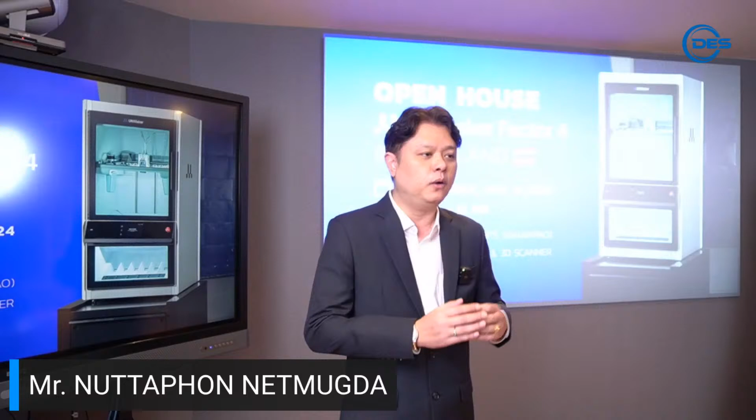สวัสดีครับท่านผู้มีเกียรติทุกท่าน ทั้งที่อยู่ที่นี่และที่รับชมผ่านทางออนไลน์ ก่อนอื่นผมขอแนะนำตัวอีกรอบและแนะนำบริษัทของเราว่าเราเป็นใคร เราทำอะไรบ้าง ผมณัฐพล เนตรมุกดา Assistant Vice President แผนก Design and Engineering Solution ของบริษัทเมโทรซิสเต็ม คอร์ปอเรชั่น จำกัด มหาชน บริษัทเราดูทางด้าน IT Solution Provider ให้บริการทั้งด้านฮาร์ดแวร์ ซอฟต์แวร์ ระบบอินฟราสตรักเจอร์ ออฟฟิศซัพพลาย รวมถึงโซลูชันด้านการออกแบบทางวิศวกรรม และที่สำคัญที่สุดคือเครื่องพิมพ์ 3 มิติ เราเป็นตัวแทนจำหน่ายอย่างเป็นทางการที่ได้รับการแต่งตั้งจาก UltiMaker จากประเทศเนเธอร์แลนด์ ซึ่งวันนี้ทุกท่านจะได้รับชมและสัมผัสกับตัว UltiMaker Factor4 ซึ่งเป็นโมเดลใหม่ล่าสุดจากทาง

UltiMaker แต่ก่อนหน้านั้นผมขอเท้าความนิดนึงว่า เทคโนโลยี additive manufacturing หรือ 3D printing เป็นหนึ่งในโซลูชันสำคัญที่จะนำมาพัฒนายกระดับโรงงานอุตสาหกรรมในบ้านเราให้เป็น smart factory เพราะเทคโนโลยีนี้ช่วยให้การผลิตชิ้นงานง่ายขึ้น ลดต้นทุนการผลิต และสามารถออกแบบหรือพิมพ์ชิ้นงานที่ซับซ้อนได้มากขึ้น จริงๆ แล้วการนำ 3D Printer มาใช้ในอุตสาหกรรมบ้านเรามีมานานแล้ว หลายสิบปีด้วยซ้ำ แต่ยังไม่เป็นที่นิยมแพร่หลายมากนัก สาเหตุหลักคือการรับรู้ของผู้ใช้งานและเจ้าของบริษัทยังไม่เชื่อมั่นและไม่ไว้วางใจในผลิตภัณฑ์ที่ผลิตจาก 3D Printer

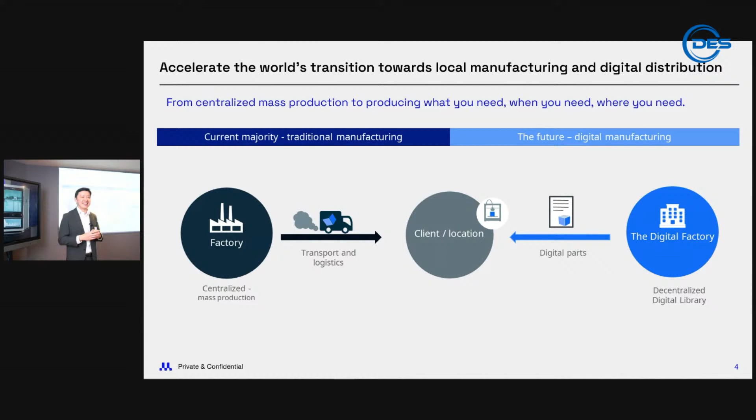But our goal is to achieve what is on the right. That is to have localized 3D printing set up in local factories, and whenever there is a requirement for a part, all that needs to flow are digital files. Digital files will go across the ocean, you print on site, and you get your parts in the shortest possible time. You may think, is this a very far away dream? But it is not, it is already here today. Because what we experienced in the past 3 years with COVID-19 - we have got countries that shut down, you don't have raw material. The Suez Canal, when it was blocked, there was a blockage of raw material as well. And that is where many manufacturers started to think of how can we achieve this dream so that they will continue to maintain the supply chain through different crises like that.

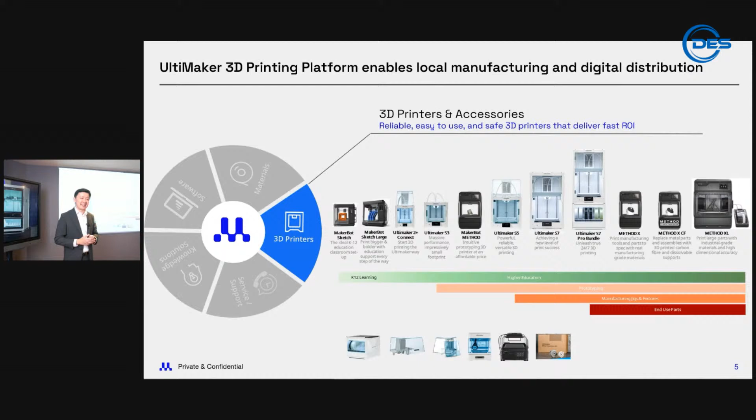Now, so currently customers are already adopting this local manufacturing and digital distribution workflow. So what are they doing right now? It is not only about 3D printers. At UltiMaker, we have a wide portfolio of 3D printers covering K-12 education to higher education, printers for the prototyping market, the manufacturing aids market, and end-use parts. So users can choose from this wide range of products. And on top of that, what is most interesting is the wide material offering that we offer at UltiMaker. Right now we offer more than 26 different types of materials directly from UltiMaker ourselves.

But what if users have requirements beyond what we can offer? That's where we have the Material Alliance program at UltiMaker, where our users can tap on more than 300 different materials from more than 65 manufacturers to achieve their requirements with 3D printing. This is something very unique, and I would dare say this is the largest portfolio of materials for FDM or FFF printing in the market today.

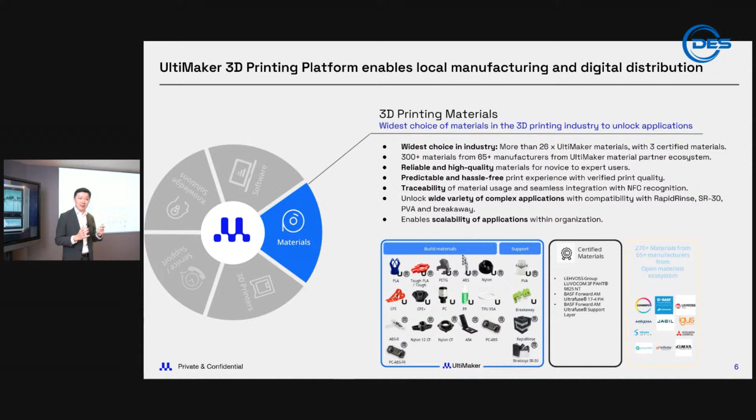Now, not only that, we talked about printer, we talked about materials, but the thing that connects everything together is software. At UltiMaker, we have UltiMaker Cura, the best-in-class print preparation software. I'm sure most 3D printing users, if you get started with 3D printing, you probably use Cura, right? UltiMaker Cura currently has more than 1 million users, and we are processing more than 2 million print jobs on a weekly basis. If a user is just getting started, they can use the basic settings where we make preparing a print job very easy. Or if the user is quite advanced, they can deep dive into more than 400 settings to customize the print job based on what they require.

So first is about print preparation. Now secondly, let me talk a little bit about the UltiMaker Digital Factory. The UltiMaker Digital Factory allows print administrators to manage their various print fleets. I talked about this vision that we need each plant to have a set of printers across multiple locations. When it is spread across so many locations, how do you manage the print fleet? That's where we have the Digital Factory, where all the printers can be connected together. You can manage print queues, manage the priority for print jobs, and even assign groups and different teams to access the various printers.

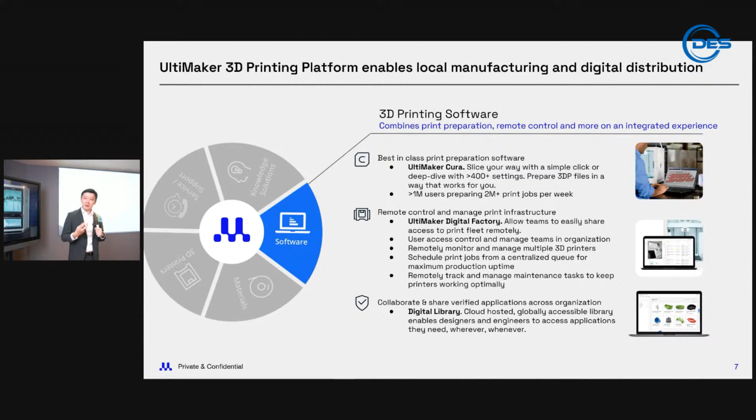And lastly, I want to talk about the Digital Library. When we talk about scaling 3D printing, many times we need to be able to share verified print parts with different locations. So this is where we have a library, which is a central repository. If you think about it, what we are doing is creating a vending machine. That means on location, if a user needs a spare part, they will browse through the library, click print, and the print job will start on their local printer. A couple of companies are already doing this right now. When the machine breaks down, they're able to very quickly print a spare part and get the line running again in the production environment.

So that is what users are using this for so far. But right now I want to give you a quick update on where we are in 3D printing in the professional and industrial segment. There was a report done by Jabil: from 2019 to 2023, the adoption of 3D printing in manufacturing aids has grown 21%, while those using 3D printing for bridge production has gone up by 20%, and those using it for production parts have gone up by 15%. This tells me that 3D printing has already matured and is getting a lot of traction in the industrial and manufacturing space.

Right below, I have plotted a chart that highlights, in a product life cycle, where are the possible opportunities for 3D printing. You can see on the left, 3D printing is heavily used in prototyping, whether it's creating visual models, visual prototypes, or functional prototypes. We also see a growing trend of more customers using 3D printing to produce production tools, manufacturing aids, or even low volume production. And of course, we have also gone into spare parts replacement as well for 3D printing.

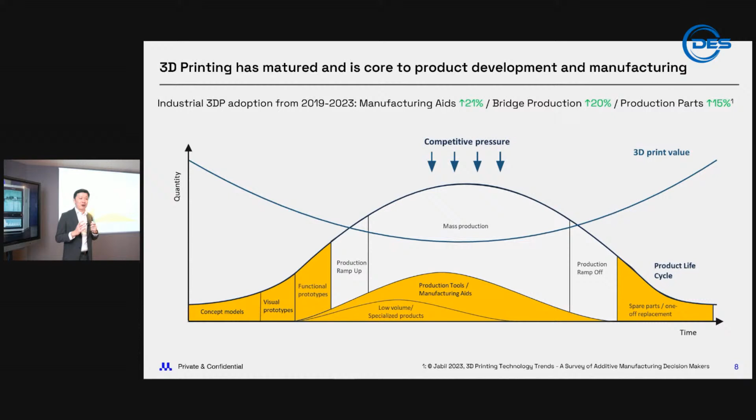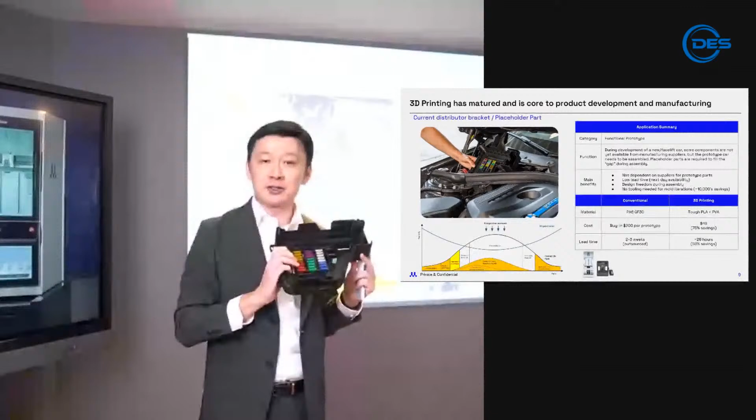At this juncture, what I will do is share with you some interesting applications. I want to show you some examples of what users are using in these different segments. First up, I want to talk about functional prototypes. This is an example of a fuse box used in the automotive sector. If you think about it, when a car company decides to develop a new car or a new facelift, there are many components that are not available yet.

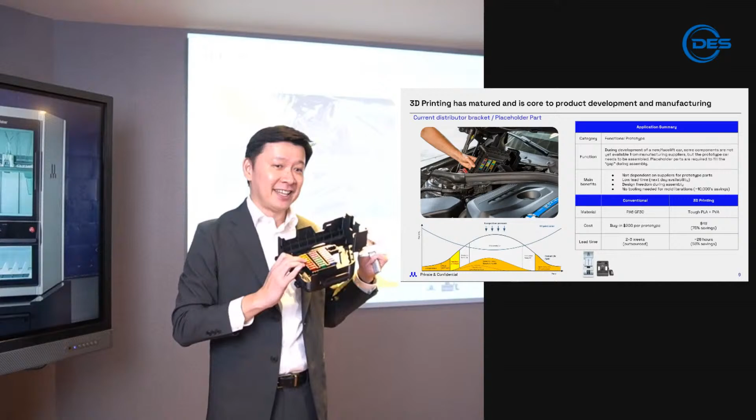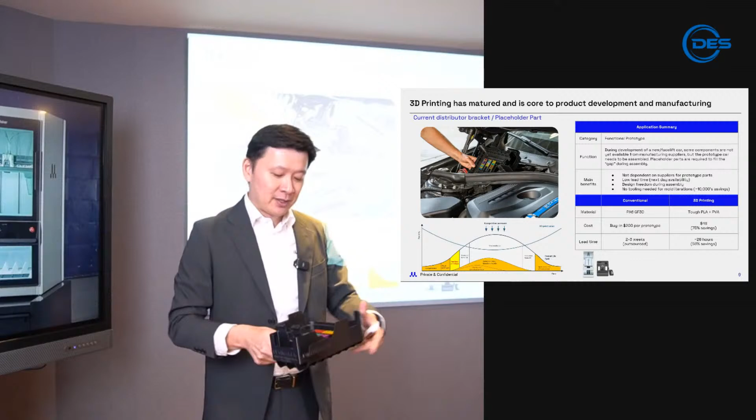Designers, while waiting for the components to come, can easily design a fuse box like this and use it as a placeholder part. That means during the R&D phase, they can put this as one of the components and build the other parts around it.

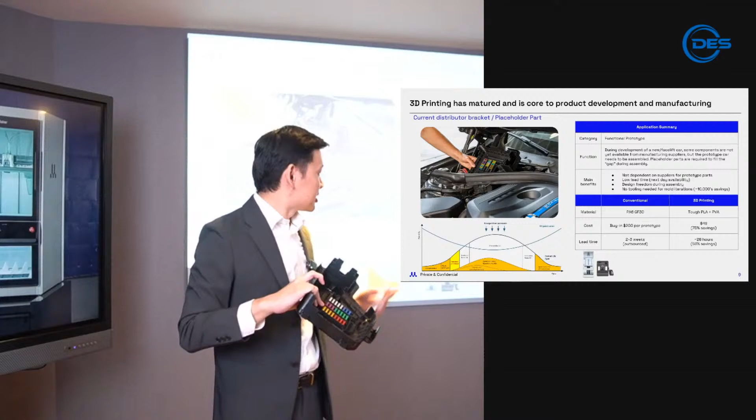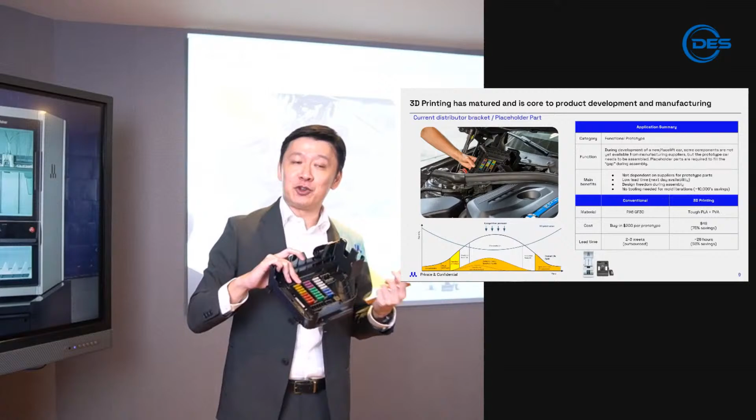What are the benefits of something like that? Definitely there is a cost saving, about 75% we estimate. But what is more important is lead time, because many times these prototypes have been outsourced and the lead time is about 2 to 3 weeks. But with 3D printing, this can be done the next day. So imagine the designer does the design, prints overnight, and the next day they collect the part and continue the prototype.

So the main benefit of using 3D printing for prototyping is innovation. A lot of people ask what is the benefit of 3D printing for innovation. It's because 3D printing allows very quick product iterations. If this doesn't work, I make a design change and the next day I have a new part, compared to waiting 3 weeks for a new version. This allows much more innovative products to be produced by the company.

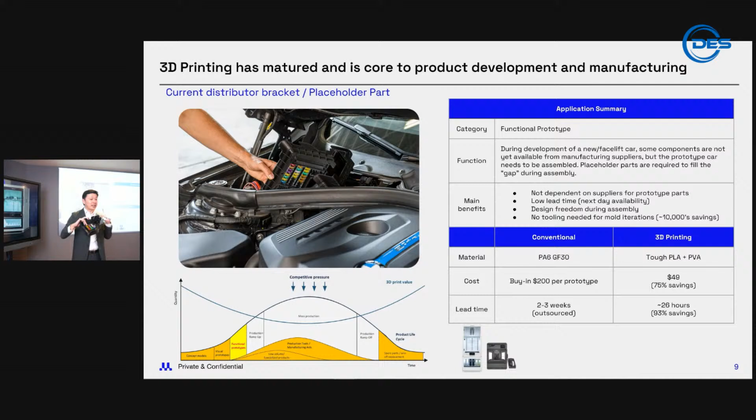So up next, let us move into the production tools and manufacturing aid segment. I want to show you another example from the automotive segment.

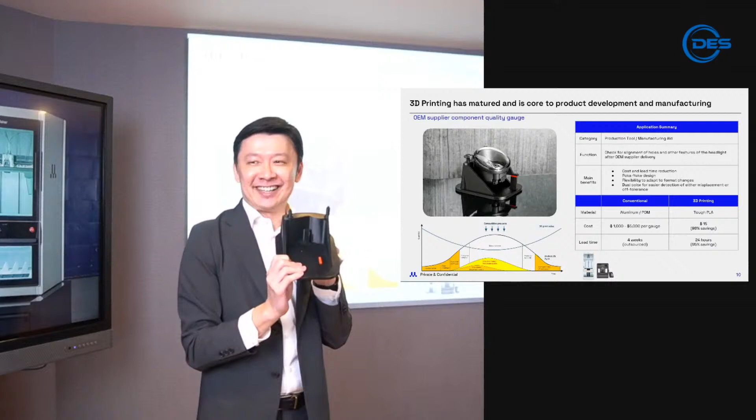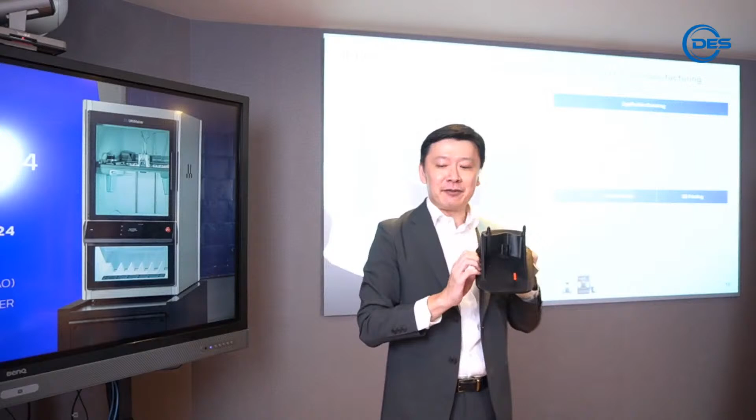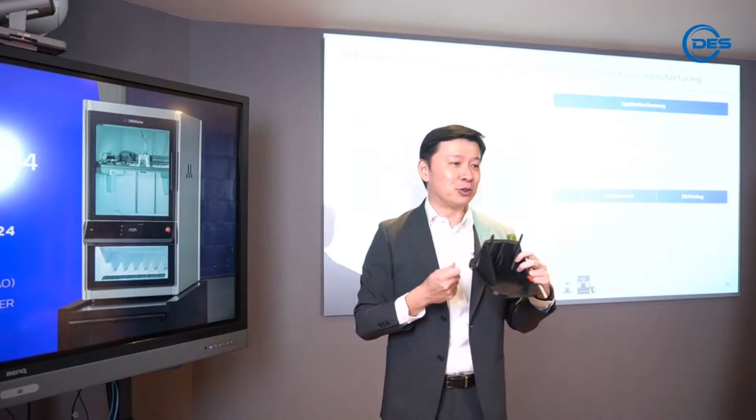This is used in quality control. This part looks very simple, a simple geometry, built with tough PLA, but the value behind it is tremendous. In a manufacturing environment, many components are purchased from external suppliers. When the parts are received, the quality department needs to do a quality check before accepting the parts. This is a lengthy process - they need to come up with the inspection document, do the CMM, take the different measurements. It's a very long process.

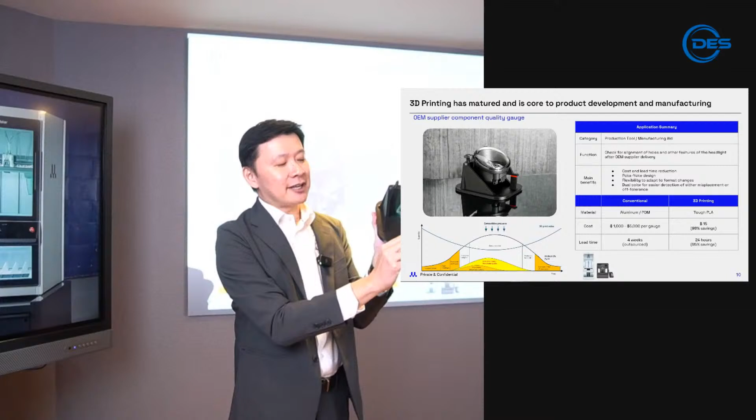But innovative companies have been creating something like this - this is what we call a go, no-go gauge for quality control. You can see the end product on screen here, this is a headlamp of a motorcycle. So now the QC person takes the product and mounts it on here - does it fit the little pins here? If it does, this passes. You also notice there is a red color portion here in this application, which gives a visual gauge to the QC inspector. If they can see the red, that means it is out of spec, and they will reject the part.

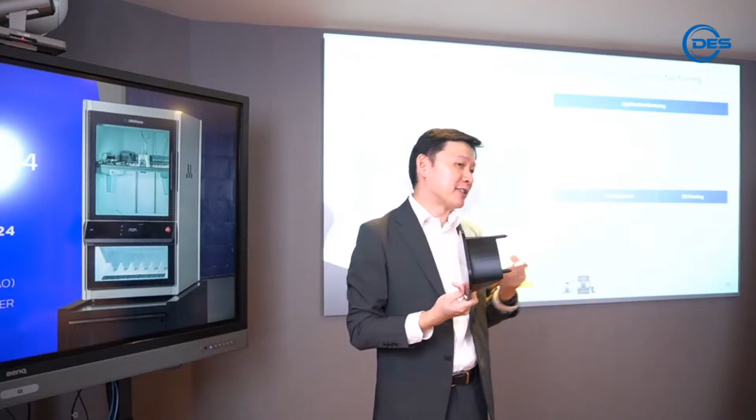A tool like that, if you customize it, usually costs about $1,000 to $5,000. 3D printing is about $15, very huge savings. But I think what is more important is you save a lot of time in the QC process. So it's an operational efficiency tool.

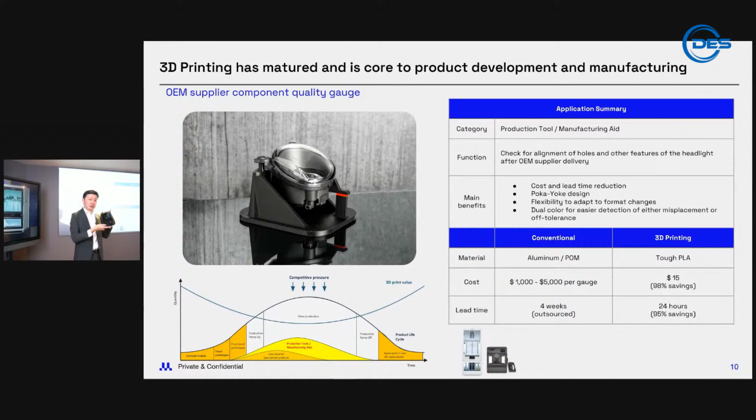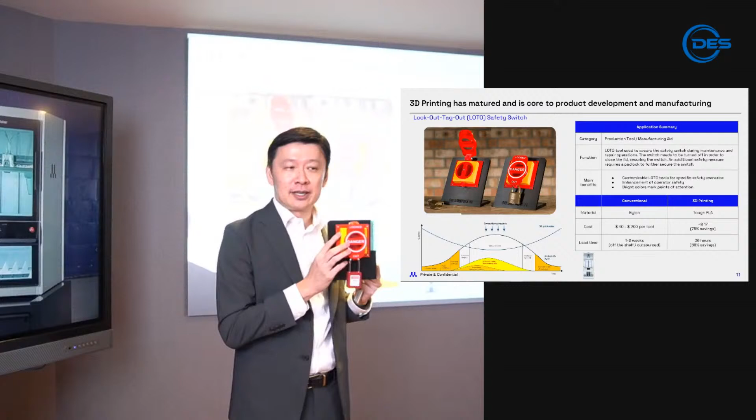Moving up next, let's talk about another important thing in production, and that is safety. We have observed a lot of users, especially those in automated packaging lines, developing a lot of LOTO tools. LOTO tools are the lockout tagout device. During the maintenance cycle, you need to lock down the machine so that the operator will not get injured if this machine is accidentally turned on.

This lockout tagout device is done in the UltiMaker S7 Pro bundle - the whole thing is printed, all the colors, all the words and everything. We are allowing customers to customize the LOTO tools to fit their safety process, because there is no price tag to safety. Safety is very important, especially in manufacturing.

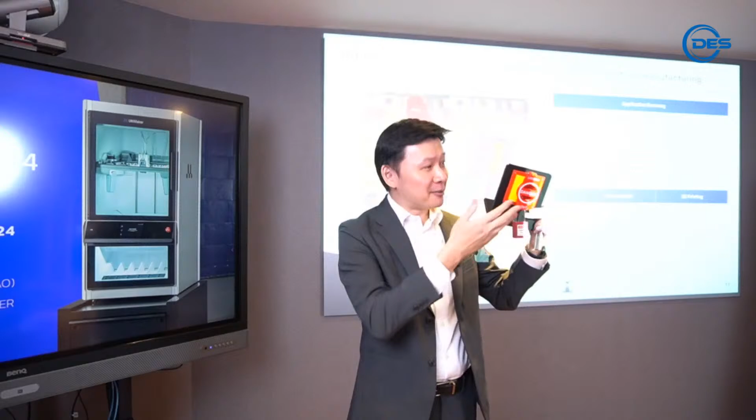So what this does is you are able to ensure it is turned to the off position, close the cover, and put a padlock onto here. After the maintenance is done, the operator will come in and unlock this. Let me try it out to show you how this works.

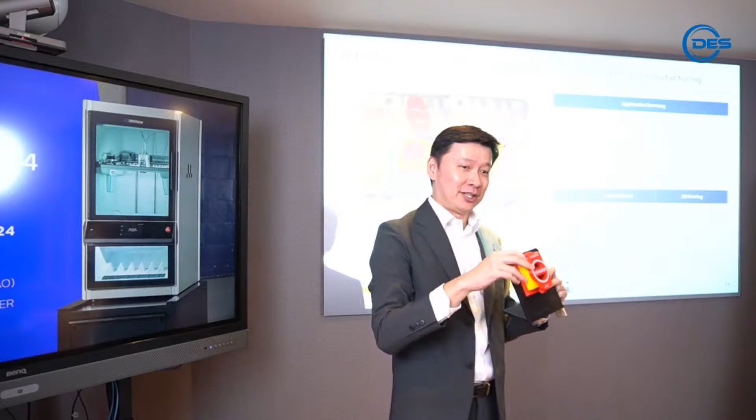When it is locked out, you take out the padlock, flip this on, and you can turn the switch to the on position. This is a very innovative tool for 3D printing. A tool like that, savings wise, is about 70+%, and usually it's purchased off the shelf, so there is a lead time saving as well.

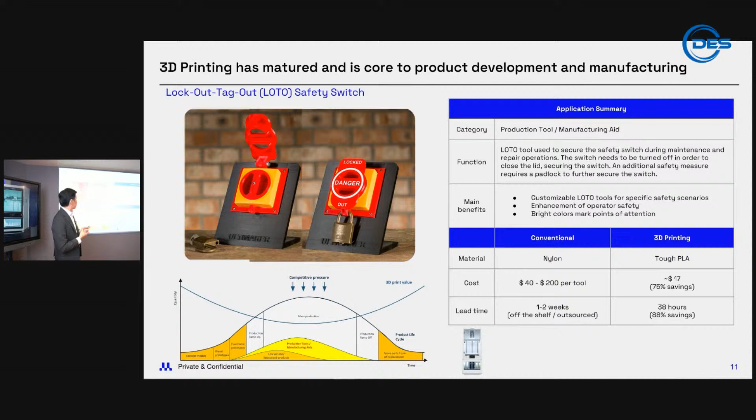Okay, the last example I want to talk to you about is more about the spare parts and also the small volume auxiliary parts market. Now 3D printing has matured to a point where you can print with a lot of high-end materials, whether composite materials, glass fiber, carbon fiber, or even metal filaments.

Good news is on the UltiMaker we have the metal expansion kit. They can print with a 17-4 PH filament, send it off to a debinding and sintering center, and get the part within 1 to 2 weeks. There are savings here definitely, but the benefit behind this is they are able to further optimize the design. They use topology optimization and generative design to fine-tune the design before coming up with the final part.

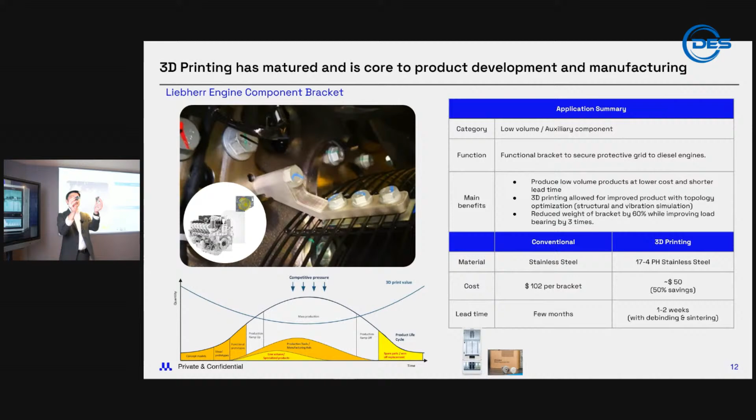So for metal parts, I do have some samples here, feel free to look at that. These are the green parts, not debound and sintered yet. And it's also very unique - our metal expansion kit has support layers. You see these white color bits? These are ceramic supports. So you can print very complex geometry metal parts as well, using the support material.

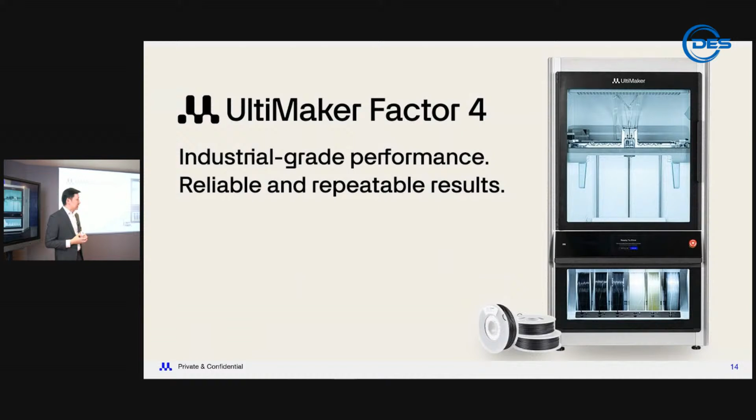So it is against this backdrop I think I've sort of convinced you that 3D printing has matured. More and more users in the professional industrial segment are using 3D printing. So it is at this juncture we thought that at UltiMaker it is the right time for us to industrialize our platform further, because we need to meet the needs of manufacturers with 3D printing. So with that, I would like to formally announce, in Thailand we are launching the UltiMaker Factor4, industrial grade performance, reliable and repeatable results. I will play a short video for you.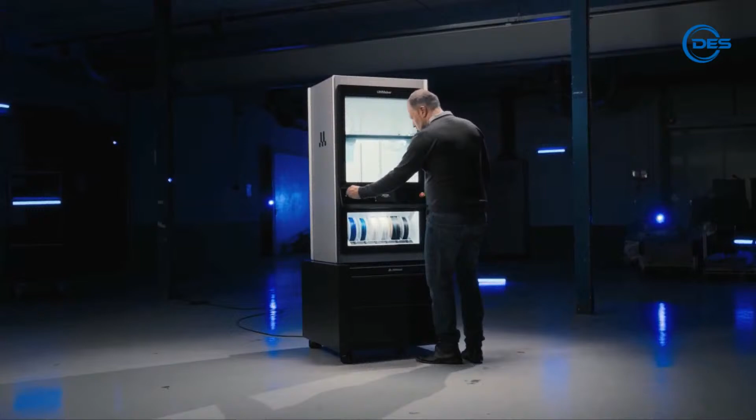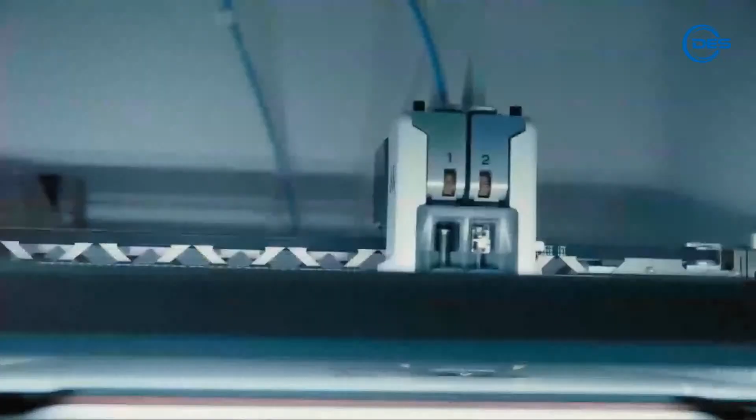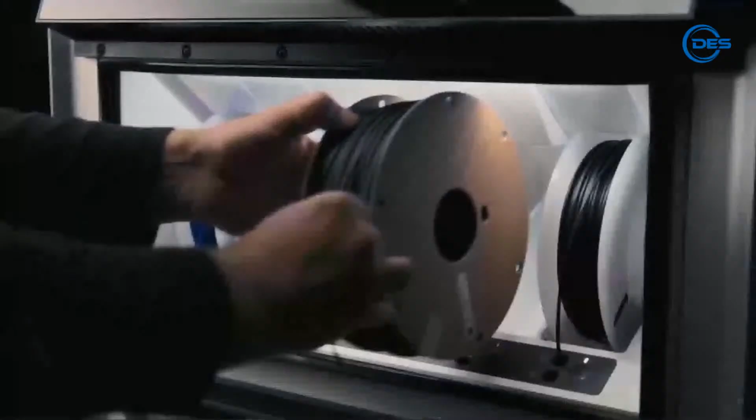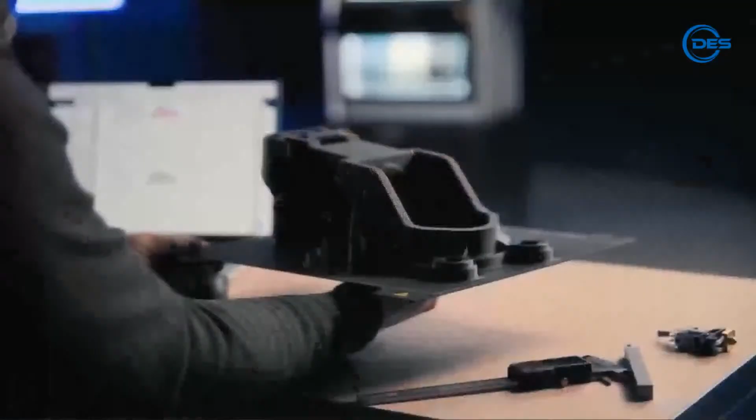Introducing the UltiMaker Factor4, industrial grade performance with reliable and repeatable results. Streamline production, simplify processes, and keep your operations running. Featuring onboard print process reporting, direct dual extrusion, and engineering-grade materials, Factor4 achieves unrivaled predictability and minimal variance. Precise temperature control across the build envelope, a triple insulated build chamber, and built-in HEPA filter ensure consistent production output on complex and challenging designs. Its H-bridge gantry and direct drive head enable rapid dual material printing. Factor4 is capable of reaching up to 340 degrees Celsius on its print cores, 70 degrees Celsius on the print chamber, and 120 degrees Celsius on its heated bed. Factor4 redefines the standards of 3D printing in manufacturing environments. Its conspicuous red stop button ensures easy and safe operation should there be a need to immediately halt printing. An integrated material handling system allows engineers to print consistently and confidently with a variety of durable and high-performance materials, ranging from the new PPS CF to fully flexible low-Shore A polymers, all while integrating seamlessly with Cura and major AM software platforms. Tested to achieve over 95% print success rate, Factor4 delivers consistent results across multiple machines. After each print, it provides an in-depth report, offering comprehensive insights into each print job. UltiMaker Factor4. Industrial-grade performance, reliable and repeatable results.

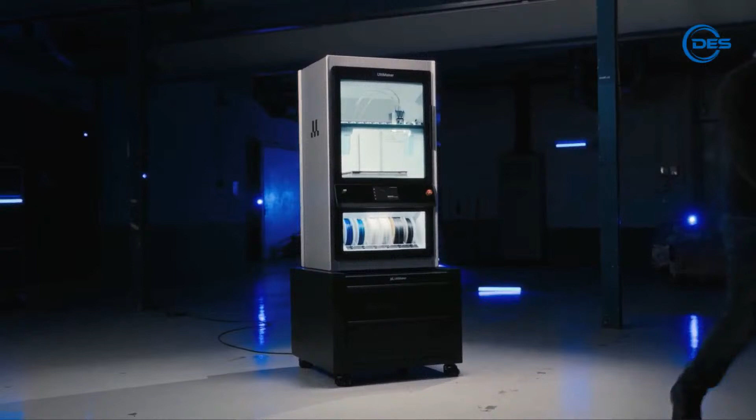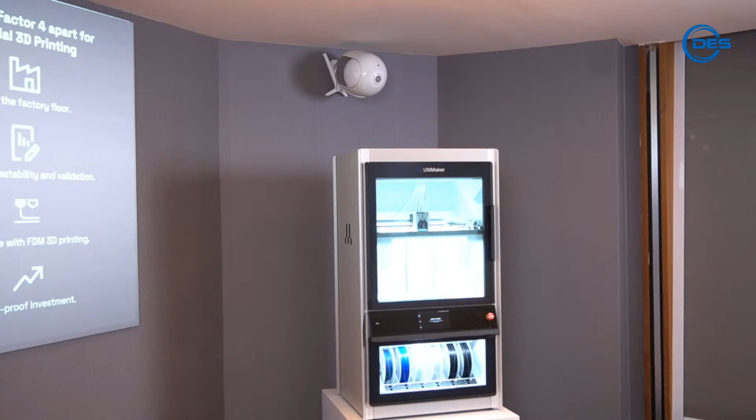Okay, that is the UltiMaker Factor4 - industrial grade performance, reliable and repeatable results. So what sets it apart from the other printers that we have launched previously? First up, it is built for the factory floor - I will go into detail on what it means. There is also a high focus on accuracy, reliability and repeatability, because these are the things that manufacturers require from UltiMaker. We will be talking about what more you can do for FDM 3D printing with the Factor4, as well as share insights on how this technology is a future-proof investment.

Okay, so first up, let us talk about the UltiMaker Factor 4 being built for the factory floor.

First look, if you take a look at the printer, it looks very different from the UltiMaker S series. For those of you familiar with the S series, you'll notice the color, the form, it looks very industrial, and the materials used are different as well. There's structural steel, more sheet metal parts used to build this printer for more stability and robustness for the production environment.

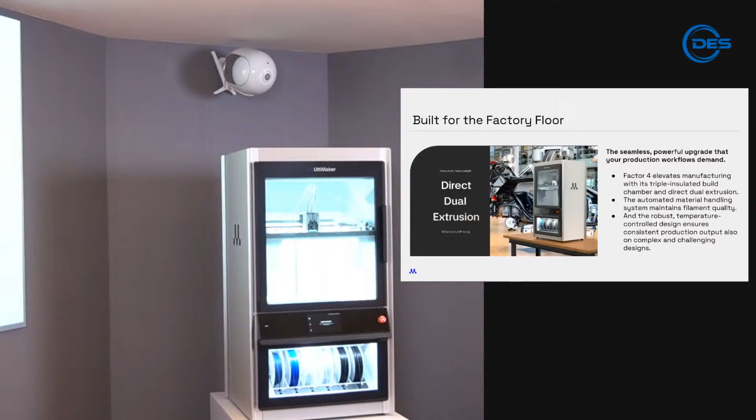And on top of that, the UltiMaker Factor 4 is triple insulated. On the sides and the back, there are 3 layers of insulation - sheet metal steel, TPU foam, etc., to maintain the temperature in the build volume. And in front, the door is double glazed, to keep the heat in the build chamber and ensure consistent quality.

And on top of that, if you look right below, there is a material handling station. This allows users to print non-stop for hours, up to 6 times 1 kg spools of filament. This material handling system also ensures that the filaments are the highest quality so that you get the best possible print results.

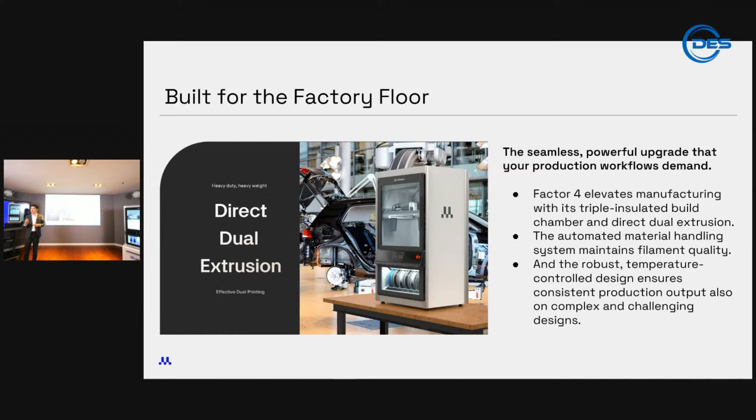So to dive deeper into the additional features for the UltiMaker Factor 4 that make it suitable for the factory floor - first up, let us talk about accuracy, reliability, and repeatability.

For the very first time, we are going to launch software in the printer itself that will generate a report after every print. That means after every print, you can download a report from the printer that will highlight possible points of weakness and possible points of failure. This is the first time ever we are taking an R&D feature and releasing it to the market because we think this is high value for the industrial segment.

And of course, in the middle, we are talking about the material handling station. It is fully integrated into one unit and keeps the relative humidity below 15%. This ensures that filaments put into the material handling system are kept dry, especially in a climate like Thailand. In Thailand, it's very humid, it rains all the time - you need to keep the filament dry to get the best possible quality.

And of course, we are also introducing a red stop button. On the right hand side of the printer, there is a button, which is a requirement for the factory floor. For the longest time, industrial customers have been asking for that, and we have made it available for the Factor 4.

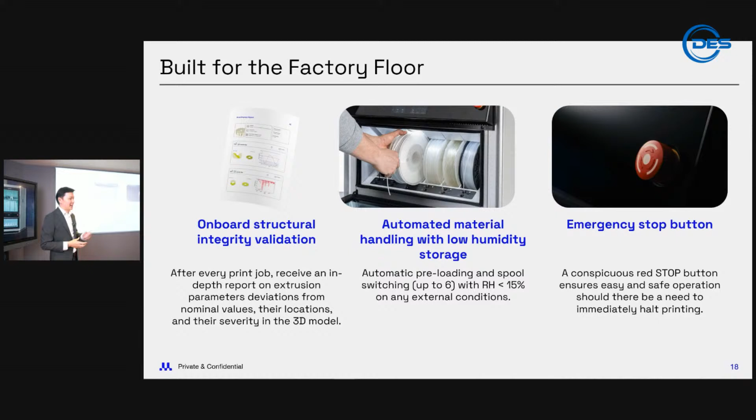Okay, so let us now talk about reliability, repeatability, and validation. For the UltiMaker Factor 4, we are promising a 95% success rate with this FFF technology. We have never done this before - we have tested it with our base materials and we can assure 95% print success rate.

But on top of that, we are also promising print accuracy. For the UltiMaker Factor 4, we are promising dimensional accuracy of up to 0.2 mm, plus or minus 0.2% of the feature nominal length, and this is across the entire build volume of the printer. If you take a look at the build volume, it's pretty huge - 330 by 240 by 300 mm. Imagine something this size with high accuracy, high dimensional tolerance - that is unheard of in the FFF segment, in this professional FFF segment.

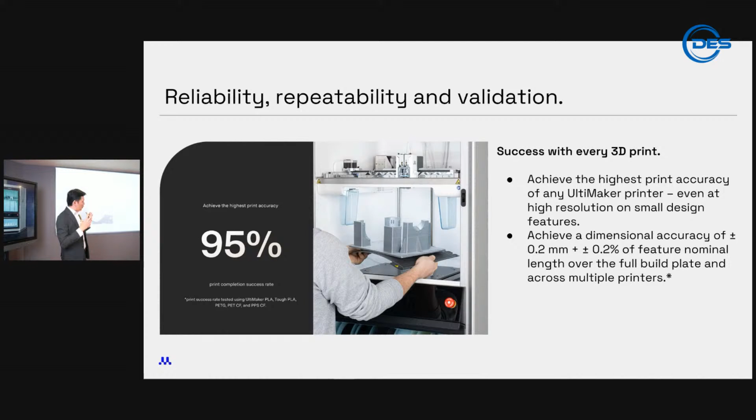So what are we doing in the technology to achieve this kind of accuracy? Let me now talk to you briefly about how we actively control the temperature in the UltiMaker Factor 4. It is actively temperature controlled up to 70 degrees Celsius in the build chamber, while the build plate is maintained at up to 120 degrees Celsius.

How we achieve this is there are multiple sensors within the printer itself. To the left and right of the print bed, there are sensors to detect the temperature of the build plate, and there's also a temperature sensor right on top as well. It will exhaust upwards.

They will detect, based on the filament that we are printing, what temperature is required. If the machine needs to increase the temperature, it will suck up the heated air from the material handling station to maintain a consistent temperature.

This way of maintaining consistent temperature, together with an H-bridge gantry made of steel that's very robust and stable, along with the brand new print head we've developed, all contributes to very high quality prints, very repeatable results, and also very reliable prints.

Even when we talk about temperature variation, the maximum we detected was about 2 degrees Celsius, which is pretty impressive for this category of printers.

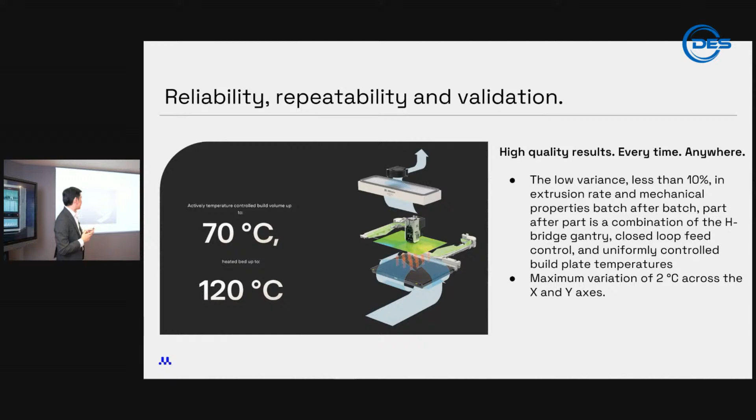With this technology, you can achieve a lot more with FDM 3D printing. Right now, for the UltiMaker Factor4, we allow for dual direct drive extrusion. This means we can now more accurately control the flow rate and retraction rate of 3D printing.

With this, we can start to print more flexible materials, examples like this. Because now with direct drive, you've got more friction, you're able to print very flexible materials. Like this is a 70 Shore A material - you can crush it up and it returns back to its form. Oops, I dropped it. So you're able to do this.

On top of that, we are also launching a brand new print core called the UltiMaker HT print core. This is a 0.6 mm print core that can print up to 340 degrees Celsius.

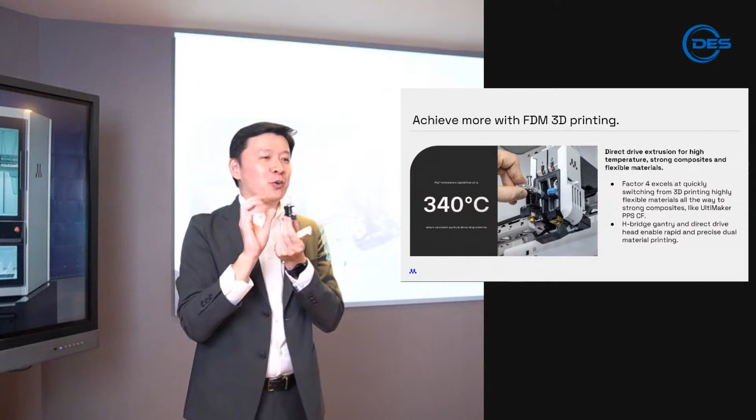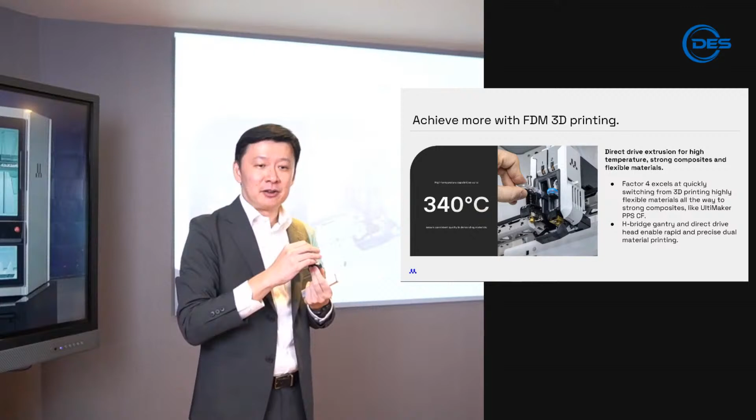What does this mean for our customers? This means right now we are allowing customers to print mid-to-high temperature, so you're able to print higher temperature resistant material to fulfill more requirements in the industrial sector.

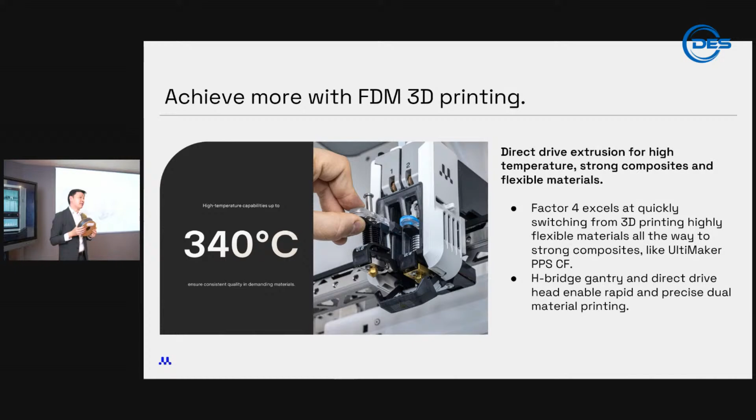And of course, together with that print core, we are launching a brand new material called PPS Carbon Fiber. I will talk more about this later on.

It's pretty interesting because this material is now very temperature resistant - it can operate up to 240 degrees Celsius. It is flame retardant, UL94 V0 certified, and it's also resistant to chemicals up to 200 degrees Celsius. So if you think about it, this is a very fit-for-purpose material for industrial applications.

And of course, the UltiMaker Factor4 is future proof. Together with all the nice things I talked about, we have also upgraded a lot of hardware. There's an HD camera on board, and there's a new H-bridge gantry.

Currently the Factor4 already prints 1.5 to 2.5 times faster than the UltiMaker S series. But with this upgrade, we are staging it for future continuous improvement as well, so in the future you can expect even much higher print speeds with this technology.

Together with that, we have also updated all the processors in the printer itself - there's stronger computing power. You can expect that with more computing power, we can introduce more technology to this printer. And I talked about the print process report - this is also one of the reasons why we needed stronger computing power to do that.

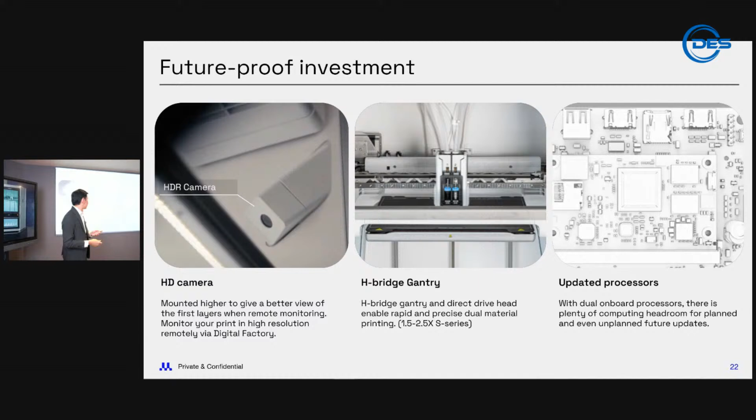Talking about print process reporting, let us spend some time on this very unique feature we are launching. Print process reporting, in essence, is a report that tells users what are the various measurements that are out of range from UltiMaker specified measurements.

So what usage is there for industrial customers? Industrial customers developing end-use parts can actually attach this report as a compliance certification to assure the end user that it has gone through this print process, and these are the findings from this report. So there's always peace of mind when delivering the end part to a customer.

And for customers that are doing batch production, doing small volume batch production of end-use parts.

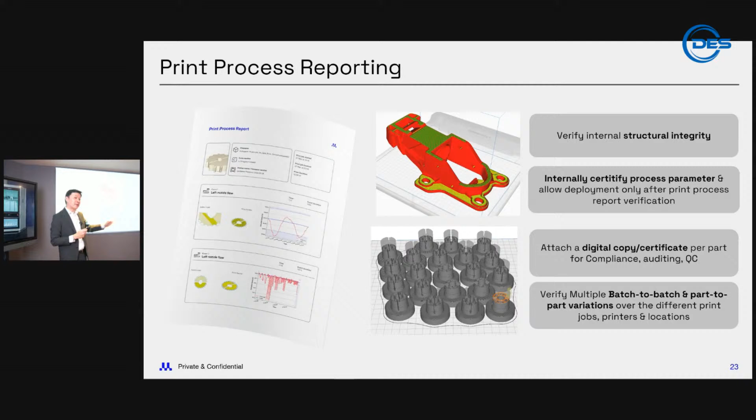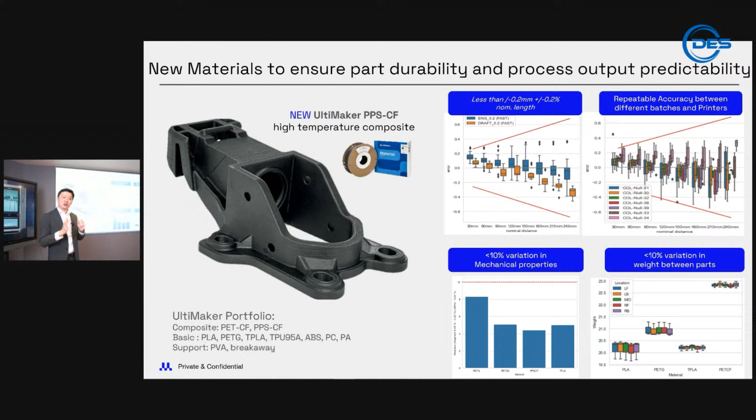Now let us talk more about this brand new material we are launching called UltiMaker PPS carbon fiber. It's temperature resistant, it's a strong material, it's chemically resistant as well. We have fine-tuned this material to ensure it fits those things I talked about earlier - dimensional accuracy of plus minus 0.2 mm, as well as a very small variance between parts, whether it's a part in a batch or a part across multiple printers. We have tested it - there is less than 10% variance for batch production. That is what we are promising to market.

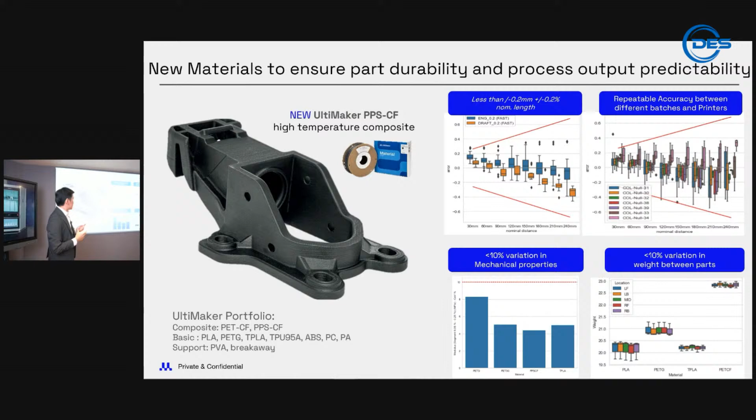So let's talk more about PPS carbon fiber. It's a very durable material for extreme conditions. The operating temperature can go up to 230 degrees Celsius, and it is chemically resistant in solvents up to 200 degrees Celsius, and it is flame retardant - it meets the UL94 V0 standard.

This application you see on the left is used in a military aircraft. In an aircraft, when transporting cargo, you need to strap the cargo down to the base of the aircraft - this is actually bolted to the ground. There is a belt that goes around the cargo and you tighten it on this application. Think about it in an aircraft environment - when the plane takes off in the sky it's very cold, when it lands in Thailand it's 35, maybe 38 degrees, very hot. Think about the temperature difference - the material is able to withstand this kind of temperature difference.

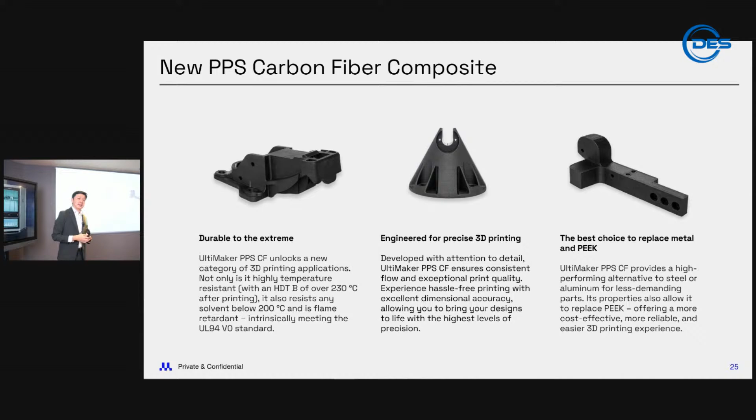Number two, being on the aircraft, it needs to be flame retardant, and it is also chemical resistant, because they could be washing it, exposing it to grease, exposed to different chemicals. So this is the right material for this kind of application. Together with that, we have developed the profile with the accuracy I talked about, so it is really for very precise 3D printing. We are expecting that PPS carbon fiber will also be a good choice to replace metal and even PEEK components. Just to give you an idea, these are the parts - this is how it sounds, sounds like a metal part. Drop it around, it is perfectly okay. This is the kind of material that is very suitable for the manufacturing environment.

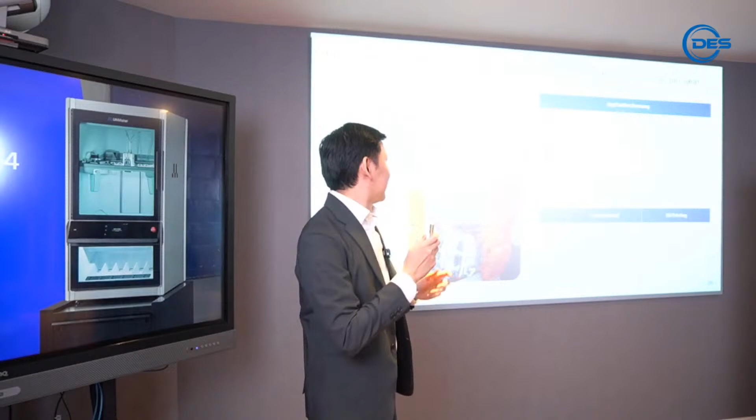Let us now talk about some of the validated cases we have already done with the UltiMaker Factor4. The first application here is from an automotive company that builds brake calipers. They have this application you see on screen - this is a holder that holds a very hot product and puts it through a robot for machining purposes. This product, when it takes a cast part out of a foundry, is at a temperature of about 140 degrees Celsius, and it is always subjected to a 12 kg compression load.

So what the engineers in this company did was develop a holder like that - this is the part that is highlighted here. They developed this to grip onto the caliper, and the robotic arm carries the caliper to a circular saw to cut away the runners and other things. They told us that they were able to achieve a lot of savings from this one application alone - they can save 65,000 euros per year.

Imagine how much savings the UltiMaker Factor4 can bring when they have developed 20, 30 or 40 applications. This is a real benefit, and currently they have told us that it's been more than 5 months now ever since they started testing, and it is still in operation.

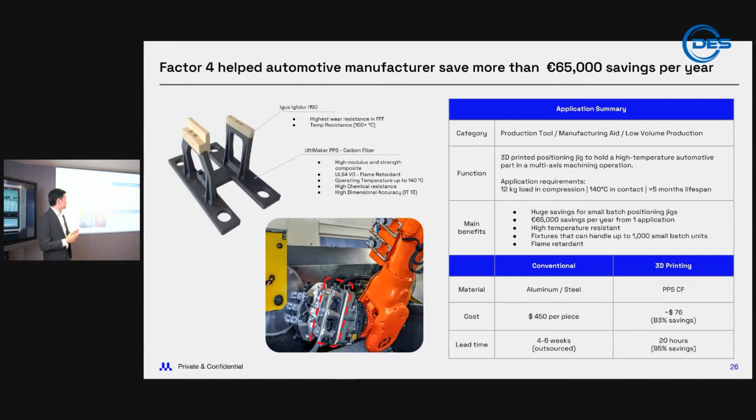Another useful application is in automated packaging lines, because increasingly we are seeing a lot of robotic arms and cobots in the production environment. A lot of manufacturers are always looking at how to make the production line more flexible. But how flexible a production line is depends on what products it can pick up, and many times it's the end of arm tooling that controls how flexible that line is.

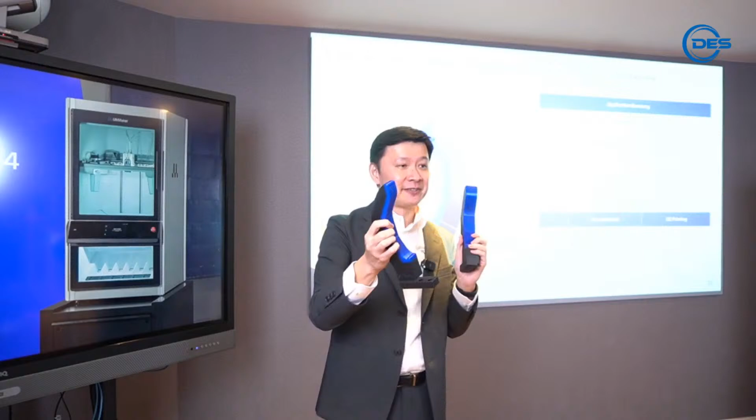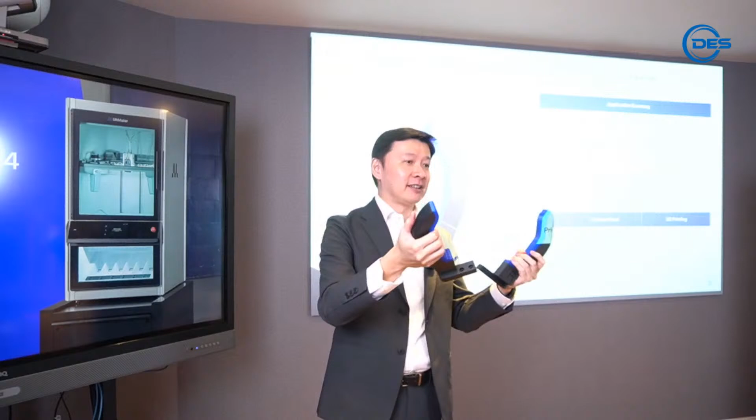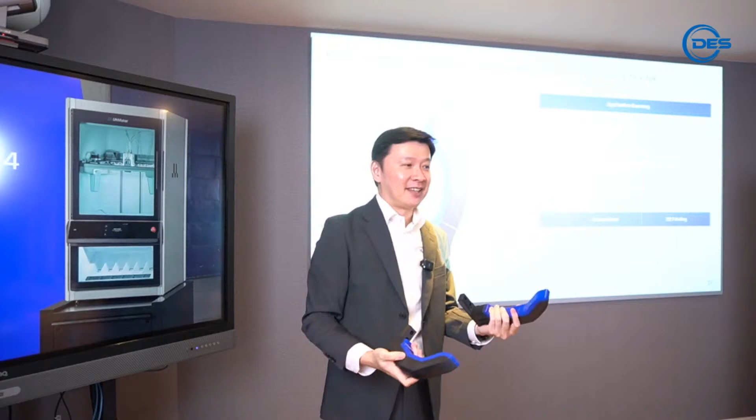Here's an example of a robotic gripper. This is built with PET carbon fiber, and on the interface, it's built with a softer TPU material. What we are offering right now is the possibility to get the best of both worlds: a very strong material with a very soft interface to protect the products it's picking. Just to show you, it's a very strong material, it doesn't just break like that. But yet it is soft enough to protect the goods that it is picking up. So customers in automated packaging lines, if you use a lot of cobots, think about how this is possible on the UltiMaker Factor4.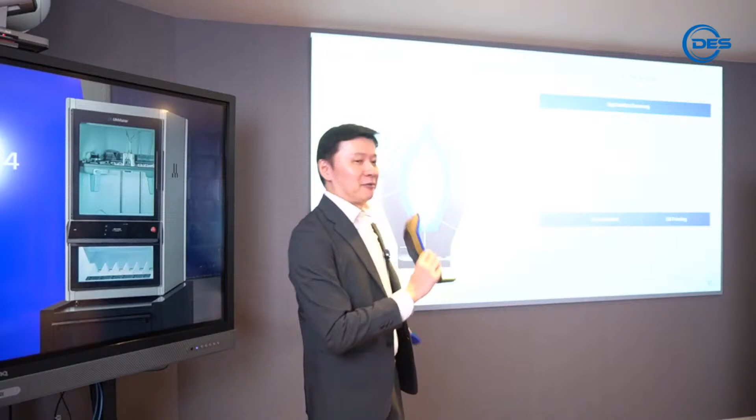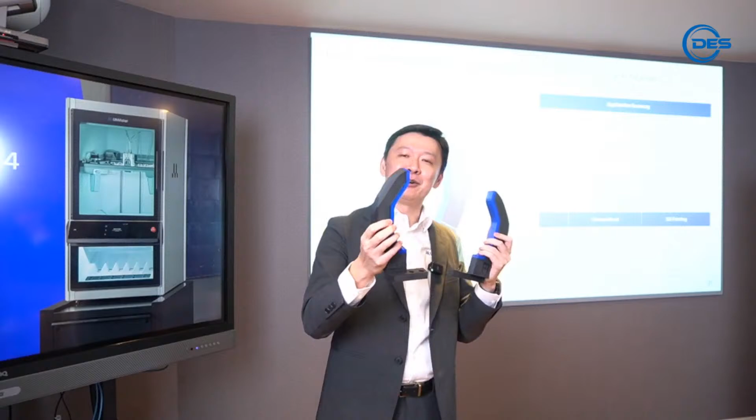One thing I need to mention, this is also made possible with UltiMaker Cura, because these materials have got very different temperatures. But somehow we have a feature that is able to merge both materials together in a single print.

On top of that, the UltiMaker Factor4, the way it is designed and developed, is highly modular in nature. The Factor4 has 35 different modules that can be easily swapped out. The reason we designed it this way is to make it easy to service, because we know for manufacturing environments, high uptime is a high requirement.

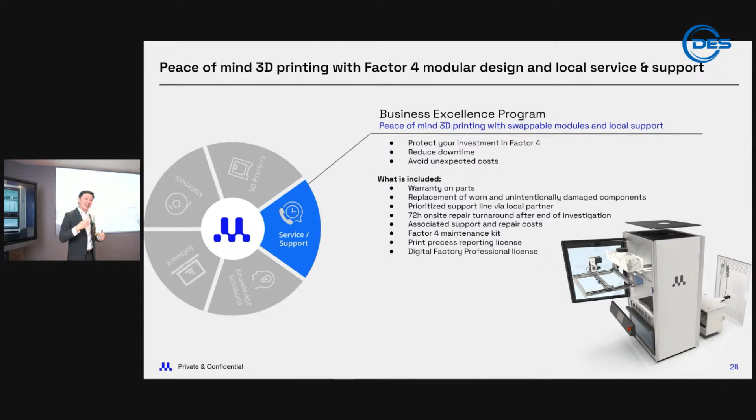So if a printer breaks down, the team, your local partner, in this case Metro Systems, will be able to do the troubleshooting with you. If we have identified that a certain module needs replacement, an engineer will go on site, replace the module with a few screws, and put on a new module, and you can start printing again. It is because of this modular nature that we are able to do a quick hot swap kind of service, so that if you are in a production environment, you have peace of mind. You don't need to think about why the printer is down. We want to get you up and running as quickly as possible.

The last thing I want to talk about is knowledge solutions. As we were talking to many manufacturers in the market, they are telling us that FDM is good, there are a lot of interesting case studies, but I do not know what materials I can print with, I do not know what applications I can develop, and I do not know how to build a business case so that I can prove to my boss to continue to invest in 3D printing.

We have things like materials. What are the materials in FFF? Which material is suitable for what application? We'll be talking about how do I identify the right parts and focus on these parts to develop for FFF.

All the way to designing. When I'm designing, what is the thought process in ensuring a successful print in FFF? All the way to Cura and print operation.

Once a user completes this, they can take an exam and receive a certificate. This is first being launched in the Asia Pacific region, and I'm happy to announce that Metro Systems is our very first UltiMaker certified training provider, launching this service to the Thai market.

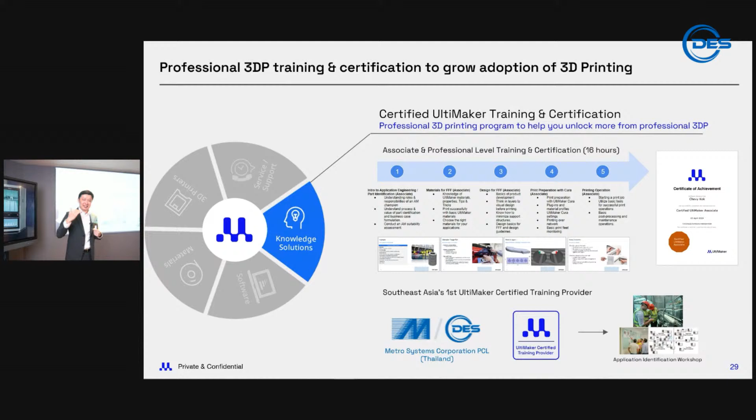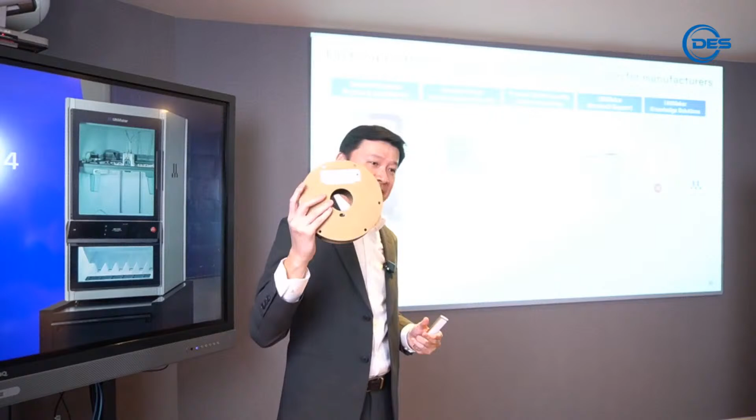We have a maintenance kit, a high-temperature print core like the one you see on camera, and in terms of materials, we are launching PPS carbon fiber, a very interesting material for 3D printing.

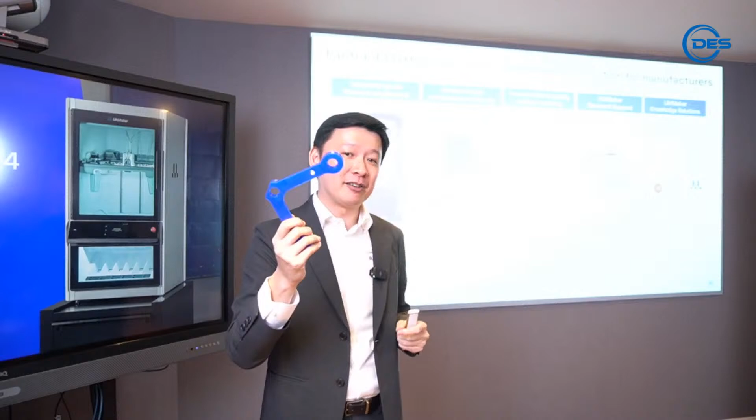We have a very robust and big third-party material alliance program, and we have a couple of material partners that have already tuned their specialty materials for the UltiMaker Factor4, including one provider that tuned a very soft and flexible material for it.

Together with that, we are launching print process reporting for generating a validation report after every print.

We have also talked about a service offering. Each UltiMaker Factor4 will come together with a service and support package so that any broken modules can be quickly swapped out and you can continue printing.

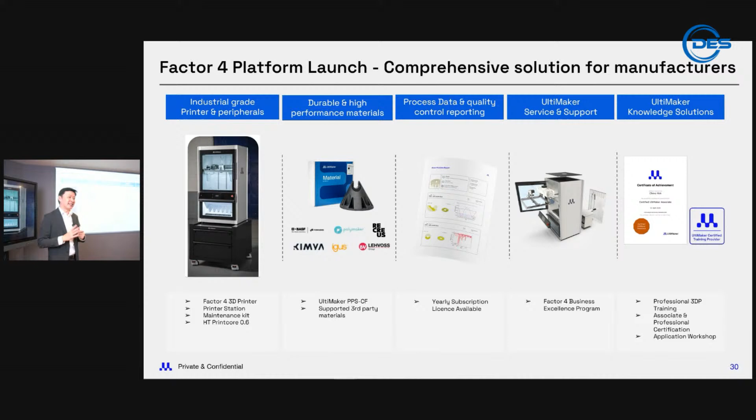Lastly, we talked about a certified training program. Users in Thailand can now come to Metro, get trained up and certified in professional and industrial 3D printing. I hope you had a good overview of the UltiMaker Factor4.